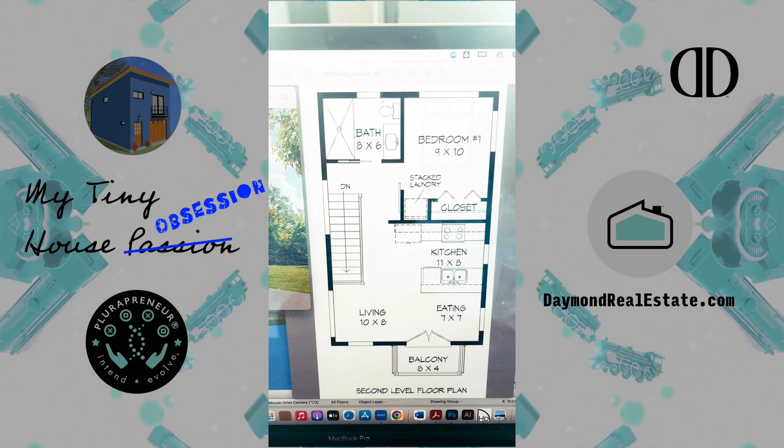Let me flip the screen here and show you how some of this started. So here's how the project started. I had a client, and what the client did was show me this picture. She showed me that picture, we call it the Blue House. And she's like, oh, I love that, I love that. That's going to be a tiny house concept that I'm going to come up with. And since I know you're building your tiny home, what do you think about that? Right? So it sparked this conversation.

And then I was telling her, I love that tiny house, I'm working on it as well. I'm not going to show you the other tiny home concepts that I have going on. But as soon as she showed me this, I showed her a tiny home concept, and this is all I really had to work on. She showed me this picture, we talked about it. We live in Texas, and I was immediately, wearing my real estate hat, like, oh, you're gonna build that in Texas?

It has a flat roof. What are you gonna do with that flat roof? Because you know how Texas has crazy weather. You can go from extreme cold to heat, and now you may literally have snow on that flat roof one part of the year, and then you have the sun beaming down on it, stripping it of all the moisture in the roof so that'll make it contract. We just don't do well with flat roofs in Texas.

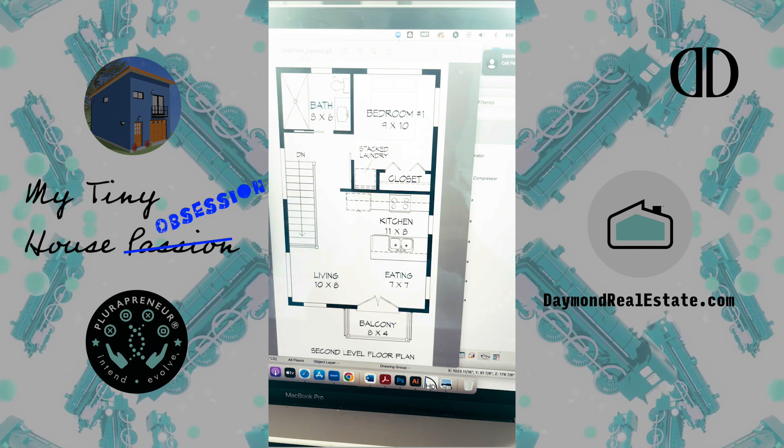The conversation went on even more past just talking about flat roofs. We went on to talk about what I was doing. She was like, well, how did you get started with your tiny home? I was like, oh, I'm designing my tiny home. Whenever I moved into my house, I said, I'm going to learn how to build a house from the ground up. So this is a tiny home, it's a smaller version of that. Of course I'm working on it, of course I'm coming up with the plans.

So one challenge that I gave to myself is that I said one thing I never want to do when I'm working with a person is be short on knowledge that I think I can acquire before I deal with the client, because I never want to go to somebody and give them information that does not make sense. I never want to talk from a place of ignorance. We have too much of that going on in the world already, in business, in corporate, in entrepreneurship.

There are so many people that are gonna feed you bullshit, right? I'm just not that kind of a person. You'll never get that from me. What you'll get from me is data, quite frankly. And I say that for a reason.

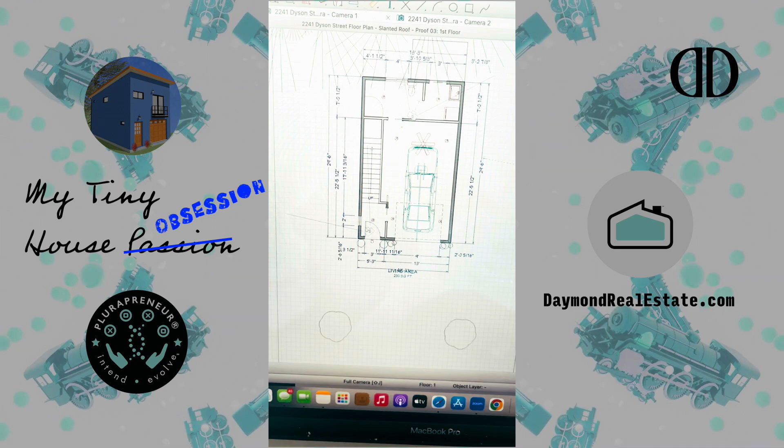So here you have it, guys. We're looking at the floor plan that I started developing after dealing with my client. You see that this is the first floor. By the way, you may be wondering what software application I'm using. I am using Chief Architect Home Designer Pro.

I am a designer. If you've been following me and my brand, I've been doing graphic design for 20 years, dealing with software applications like Adobe for a very long time. So when I took on this project, it was sort of simple for me to move from doing things in Adobe Illustrator and Photoshop, and apply that skill set to Home Designer Pro.

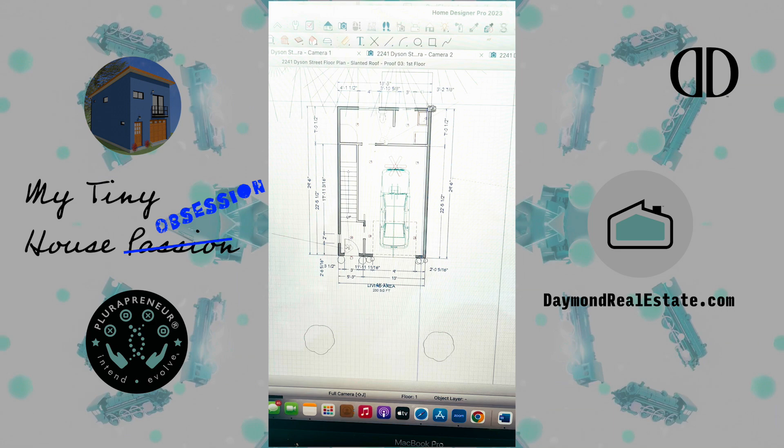Now, the really good thing about this software is that there are a whole bunch of different layers you can use, and it has CAD software running in the background, which is awesome. When I'm working with it, I'm looking at it from a technical software perspective as well as a design tool. I think that's what really helps me navigate through the tool so well, and it also helps me have very pertinent conversations with people when I'm taking them through the design.

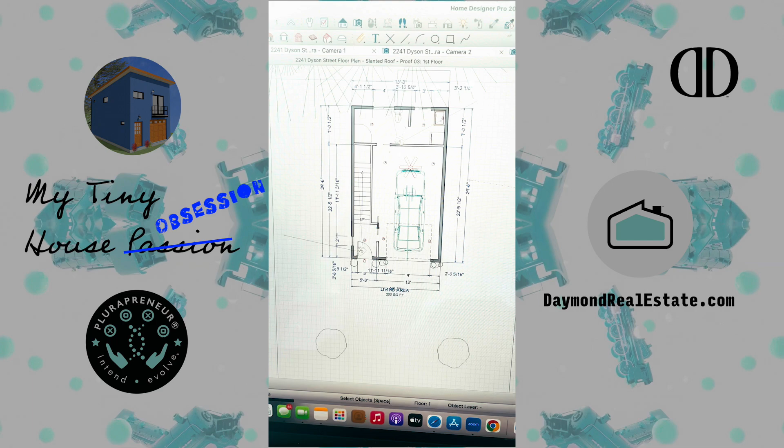But what we did is, this is the first floor of that blue house. The floor plan is completely different. I can tell you some of the conversations that we had. Here, when you look at the stairwell, a lot of times when you find these drawings online, you'll see things with dimensions in them that are half baked. We ran into that same situation with this blue house.

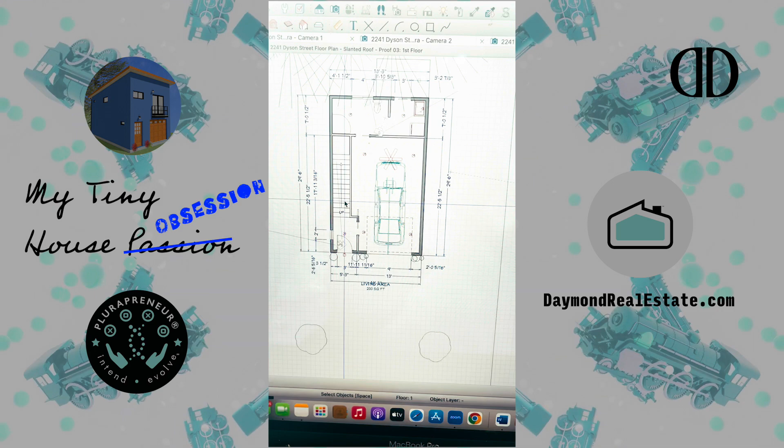So when I was designing the stairway, I talked with my client. I said, hey, I had to do some things with the length of your stairway, give you 16 risers because your ceiling height is 8 feet. When I looked at the original floor plan she found on the internet, that floor plan did not match the height of the house. So I made some adjustments, because one of the main things you worry about in houses is how comfortable the stairs are. Can you get up the stairs well? Are the stairs too narrow? Is the angle of elevation too steep? So I had that conversation with her.

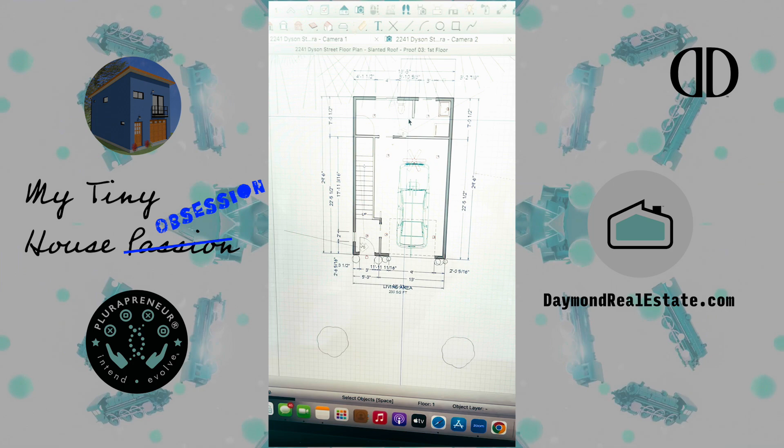Also, there was a lot of room back here that initially was going to be storage, but we decided to make it a downstairs bathroom and washroom with a shower. Because if this is going to be a tiny home, and you probably have some entertainment space around it, maybe a pool or something, you want to have some space down there where people can use the restroom, take a shower, and have access to a sink. On the main floor, which is the second floor, you probably don't want a washer and dryer because you want to optimize the space you primarily live in. So we put the washer and dryer in this downstairs area right off of the garage.

We'll pan around it pretty soon, but I want to keep this video pretty short. This is the upstairs. Now you see what we did. Remember when we looked at the old floor plan, it was so different—the kitchen was in the middle.

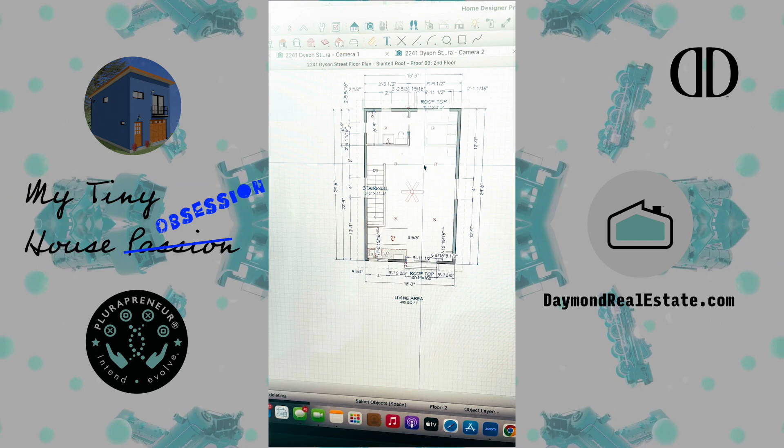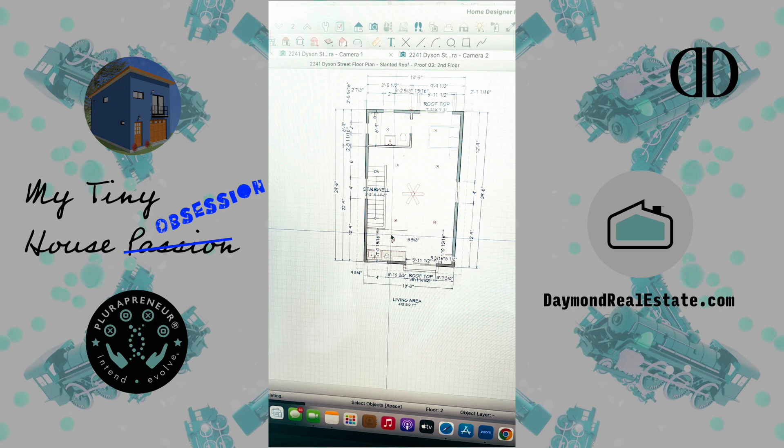There was a wall here. The bathroom was still in the same area, but we made some changes. I think we optimized that space pretty well, and really optimized all the space in that upstairs living area—495 square feet, guys. So we want to optimize this, make it very lofty for this tiny home space. We decided to move the kitchen toward this corner front area just to optimize the space.

Right here, we're kind of wondering what we're going to do. I think this is going to end up being a TV wall. So we left this wall up with no windows so that it could be a TV wall.

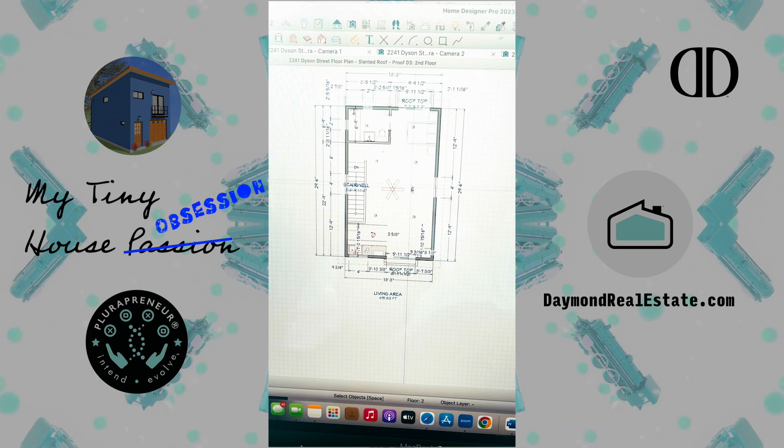Now I know this isn't so interesting because you're just looking at a floor plan, but I'm going to put a camera in here so we can pan around the room, which will make the video more interesting. Whenever we pan around, remember this is only 495 square feet, but look how open the space is. The key is always optimize, however you can. I love this tool—I was able to go from the floor plan to a 3D cartoon rendering of the space. As a designer, this makes me feel really good. Seeing linear 2D drawings translate into a 3D cartoon rendering makes it seem so much more achievable.

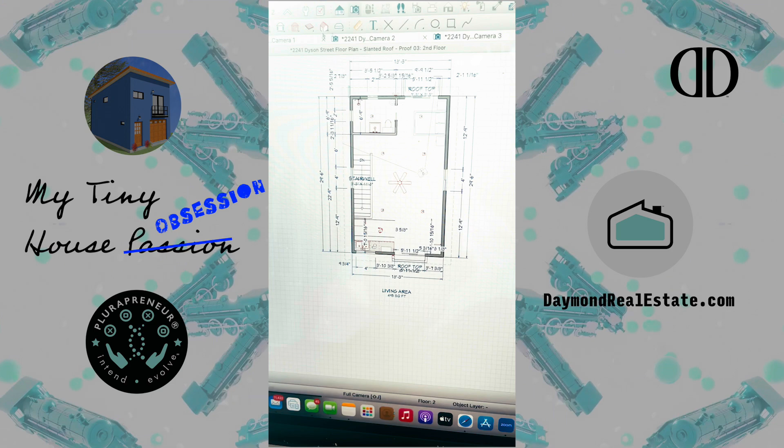You follow my brand, so you know how focused I am on visualizing the type of life you want to live—visualizing what's in the realm of possibility. When you see me working on projects like this, that's exactly what I'm talking about.

So we went from the main living area upstairs to the bathroom area, and we really optimized the space here. One thing my client really wanted was, since we have a shower downstairs, also a garden tub here—this may turn into a freestanding tub, we don't really know yet. The initial ask was a garden tub, but on the phone we discussed maybe wanting a freestanding bathtub instead. We have a really nice bathroom area upstairs, and since this is a tiny home, I wanted to make sure we have a farmhouse sink in that bathroom, because this tiny home has to literally optimize everything in it. It's a very nice space for a bathroom, about 6 by 9 or 6 by 8. I think we did a really good job optimizing the space in that area.

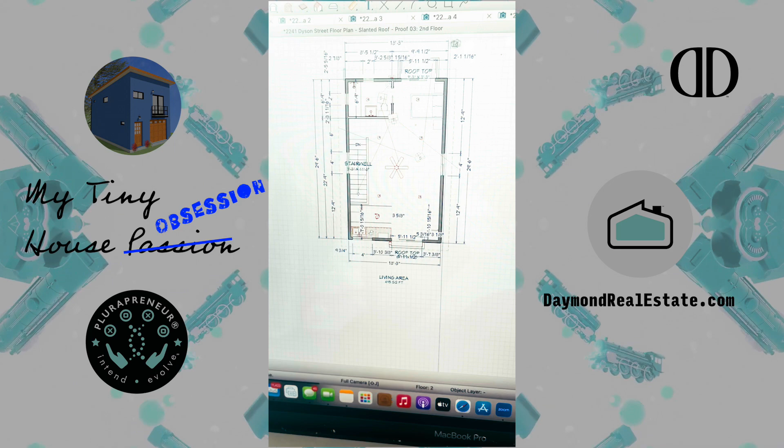But at the same time, you don't need to add all of that extra support. Instead, what we ended up doing is we decided that instead of focusing on that huge balcony on the front of the home, why don't we keep that, still keep it to where people can stand and go out there and get some fresh air. However, at the rear of the home, we said, let's focus on that big balcony there. And it's also going to be cheaper.

Why is it going to be cheaper? Because we're going to be able to extend it 3 feet, put a concrete patio down there, support that balcony with 2 columns, guys, and now you don't have to worry about it breaking off. This is normally how balconies are done, to save costs. So remember, I'm all about creativity. I'm all about doing stuff well, but I'm also about saving costs. If you've dealt with me, you know that.

So I think this really makes it to where if people opened both doors, that breeze flowing through this space will be awesome. I mean, just imagine living in this tiny home, opening up those doors and then letting that breeze and that fresh air in. Wouldn't that be wonderful? That'd be just like superb.

Another thing that I really wanted to bring your attention to, and this is the very last thing, guys, is this roof. Remember, I was telling you in Texas, you really don't want a flat roof. You want a slanted roof. That way you don't have to worry about snow piling on that roof, and then now it becomes unsturdy and may even cave in.